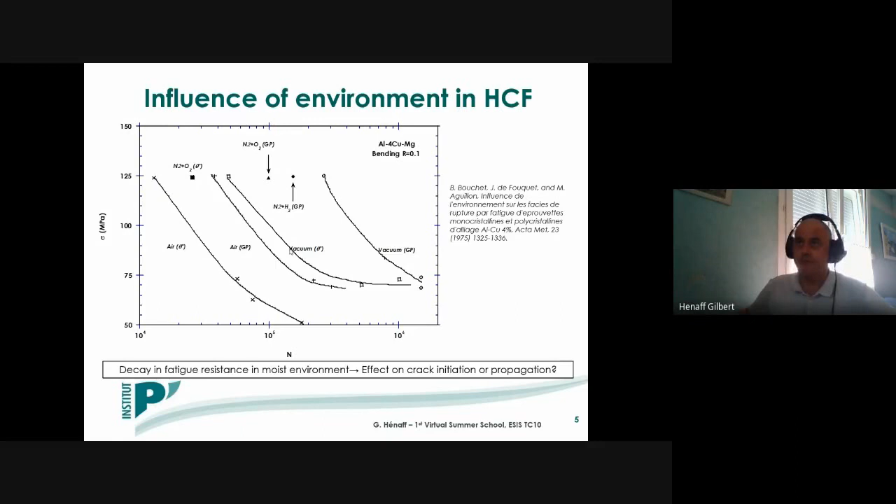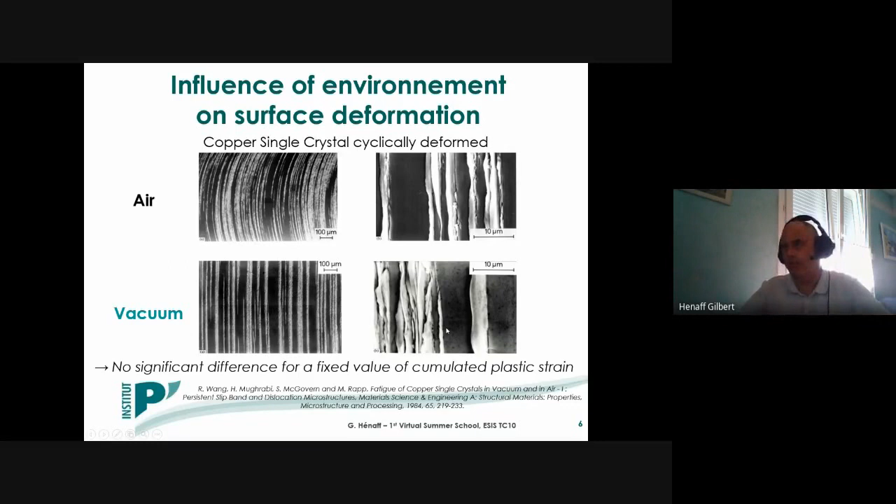crack initiation. However, when comparing these observations between air and vacuum for a given value of the cumulative plastic strain, what was concluded is that there is no significant difference in the surface relief which is formed for a fixed value of this cumulative fatigue plastic strain.

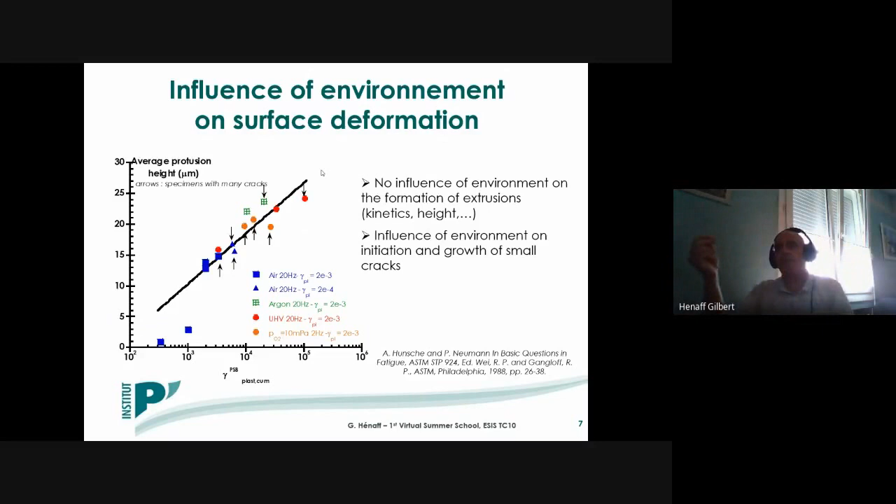And so the conclusion from all these observations was to say that environments such as ambient air do not influence the kinetics of the formation of the surface relief, but will mainly act on the initiation process, and most probably on the growth of small and then long cracks.

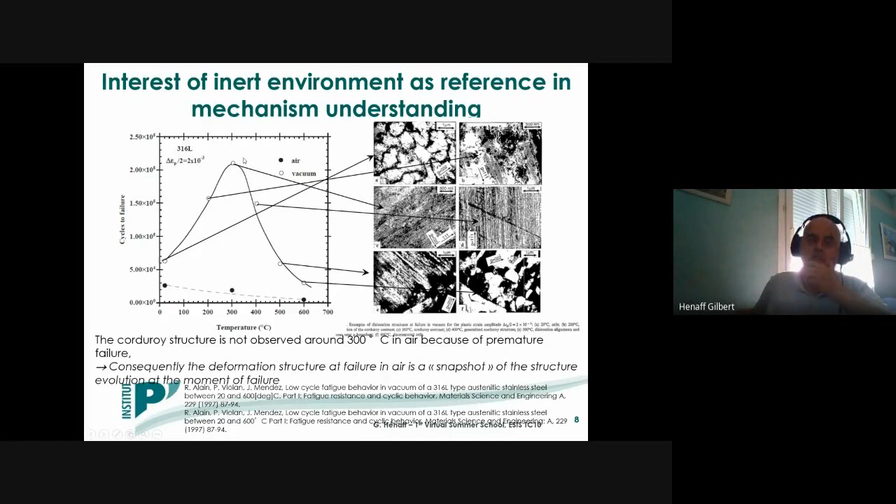However, when looking at the data obtained in vacuum, you can see that we have a maximum in the fatigue life, which is much higher, around 300 degrees C, and then decreases again. At 600 degrees C, the difference between air and vacuum is not so large.

And this special behavior in vacuum was explained by looking at the internal dislocation structure, where it was shown that at low temperature, you have a classical cell formation, dislocation cell formation. And when temperature increases, this structure evolves towards the formation of this special microstructure consisting of lines of dislocation, which is called the corduroy structure.

And again, when moving to higher temperature, you modify, you disable this corduroy microstructure, and you find something corresponding more or less to the cell structure.

But the point is that if you perform the same type of observations in air, you will not observe the corduroy structure at 300 degrees C, because failure will occur much earlier during the fatigue life due to the assistance of environmental effects. Typically, the deformation internal structure that you would observe in air at 300 degrees C would be only a snapshot of the evolution of the dislocation structures towards this corduroy structure.

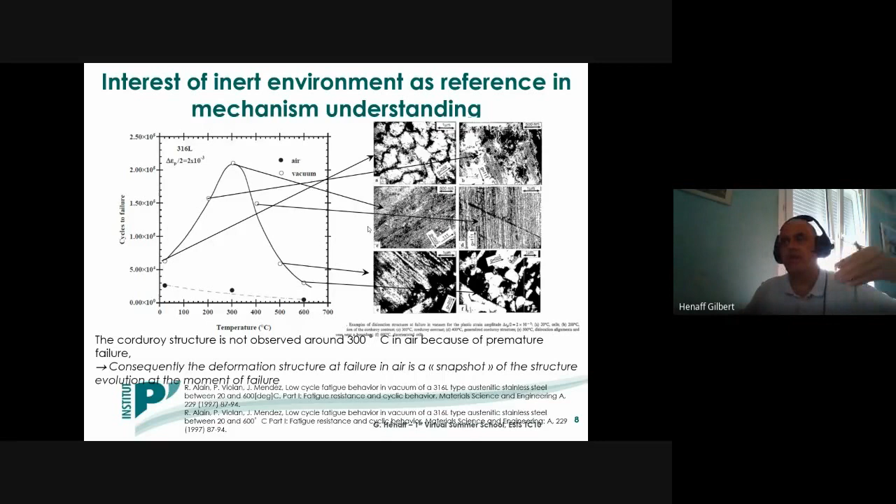And this raises the question of selecting air as a reference environment for the design codes of this type of structure, typically piping systems in nuclear power plants.

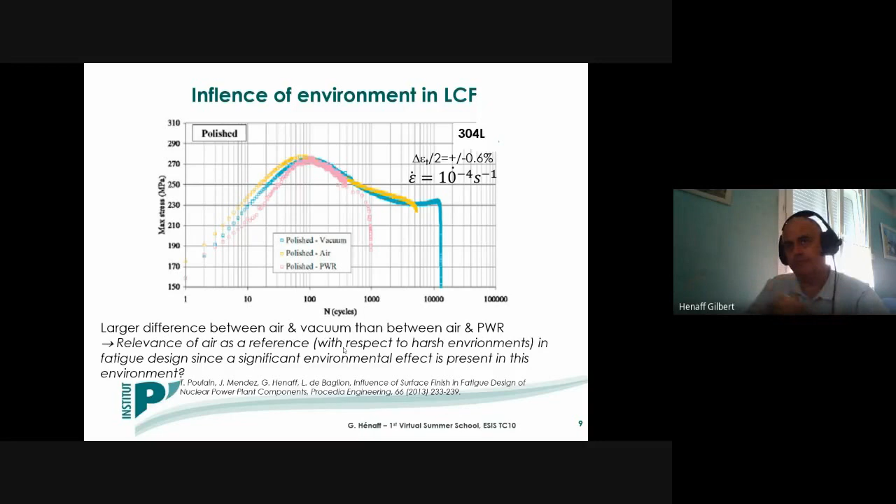So that means that in many cases, ambient air is at least as aggressive as other environments which are assumed to be corrosive.

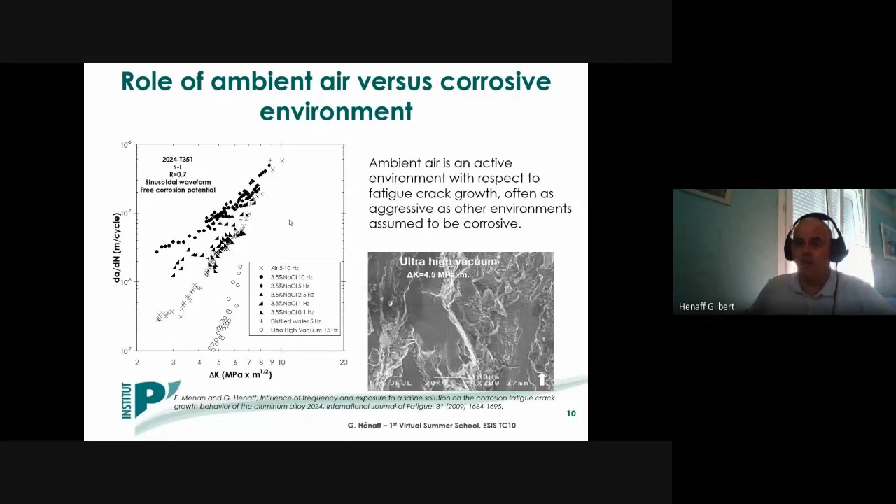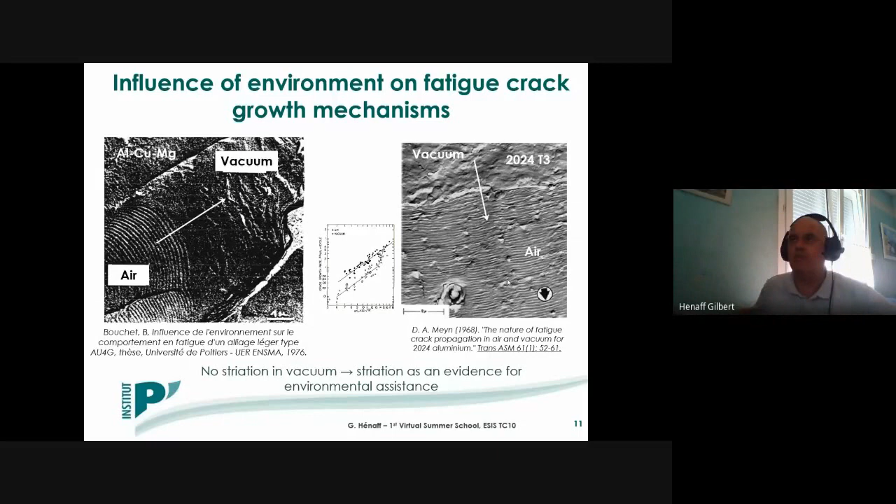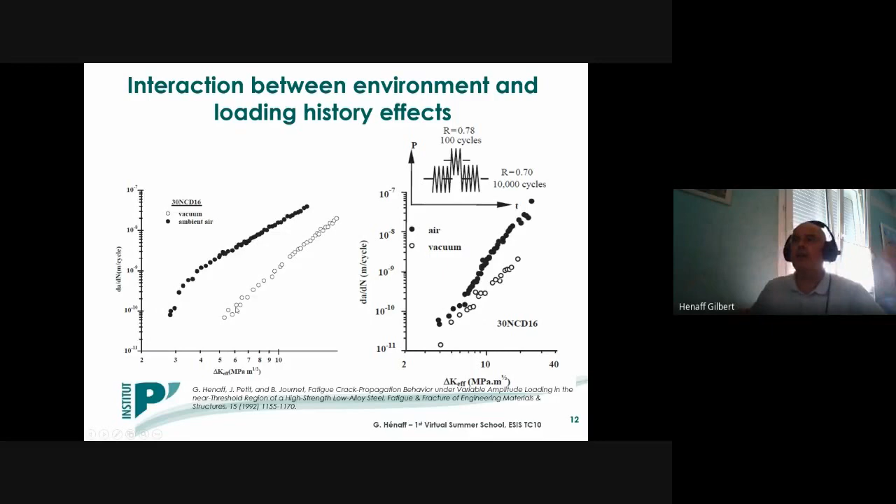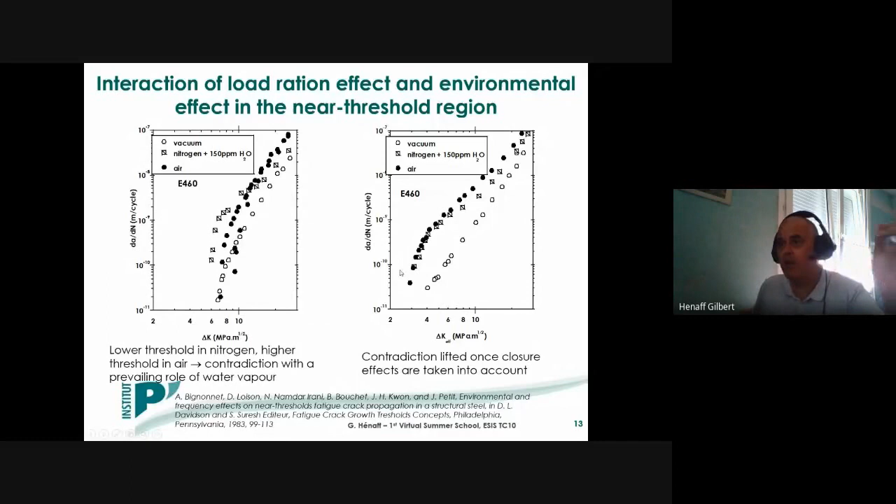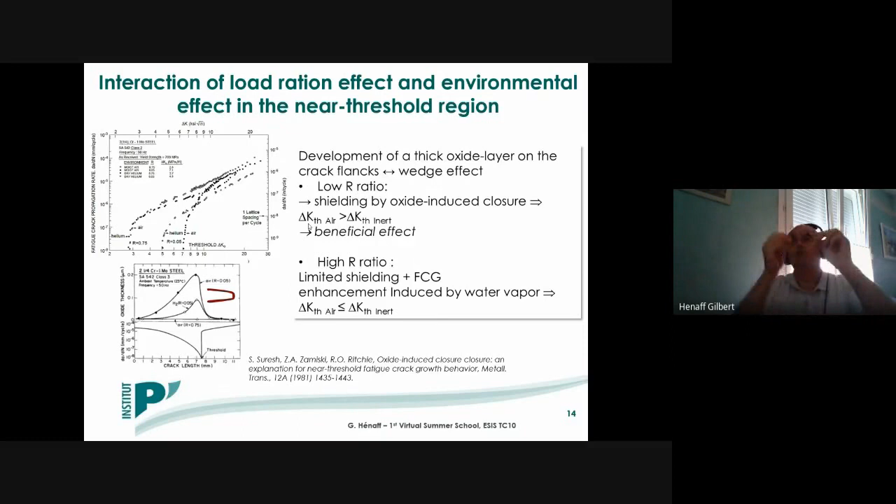On this graph, you have some measurements of the oxide thickness on the fracture surfaces in air or in hydrogen containing traces of water vapor. What you can see is that in ambient air near threshold, the oxide thickness is much more important than in other environments, or even in ambient air when considering a higher value of the load ratio. So near threshold, at low R ratio, you have a kind of wedge effect induced by this thick oxide layer, which will in turn induce a shielding of the crack tip and reduce the effective value of the stress intensity factor range at the crack tip.

As a consequence, in most cases, the threshold in air will be higher than the threshold measured in inert environments or environments with only very small traces of water vapor. But what is important to note is that this is beneficial from the point of view of the global fatigue crack growth rate resistance.

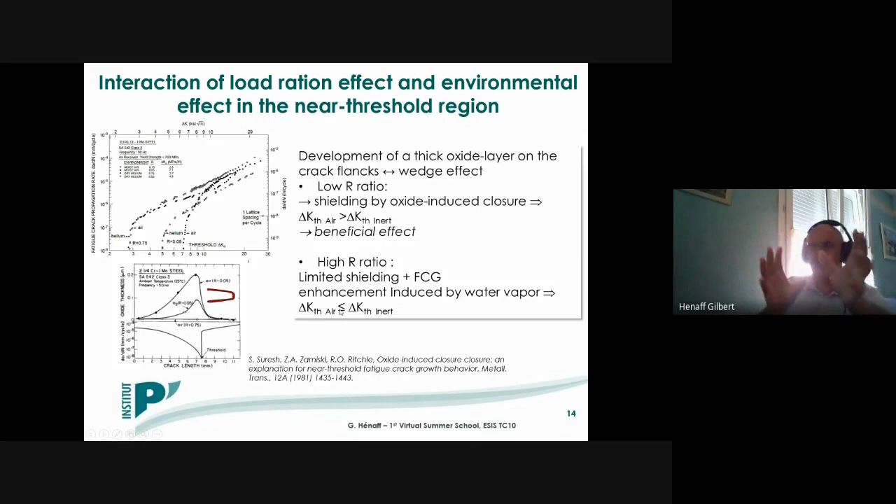However, at high load ratios, the shielding induced by closure will be extremely limited. In addition, this is partly due to the fact that the oxide layer will be much lower in that case. So you will have a combination of limited shielding by crack closure, but still the presence of fatigue crack growth enhancement by water vapor. As a consequence, the threshold in air will be lower than the threshold in inert environments.

So from all these examples, we can deduce some methodological aspects. Our objective in the following will be to try to identify the specific environmental effect on the crack tip damage and not on the overall fatigue crack growth resistance, in particular by taking into account the shielding induced by crack closure effects.

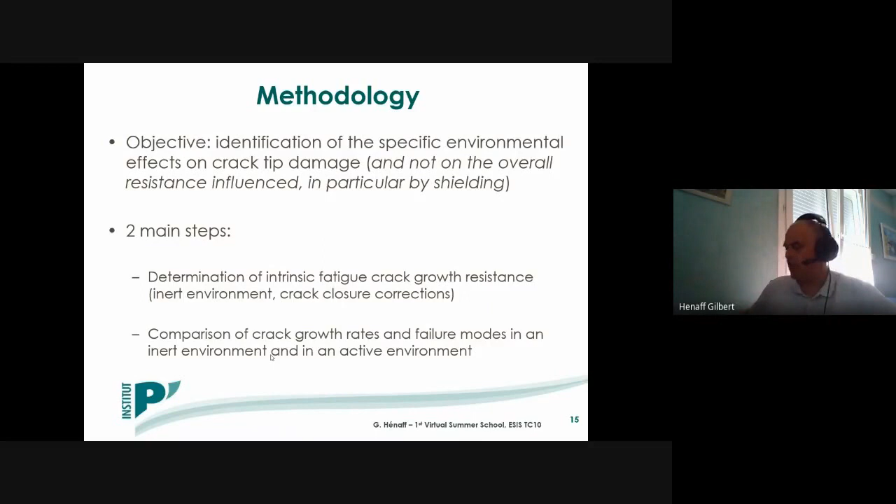For that, we will proceed along two main steps. First, we will have to determine the intrinsic fatigue crack growth resistance, that means in an inert environment and after crack closure corrections. Then by comparing the fatigue crack growth rates obtained in an active environment such as ambient air and in an inert environment, but also by comparing the fracture surfaces, we will get insights into the mechanisms operating at the crack tip. So let me say a few words about what I mean by intrinsic fatigue crack growth resistance.

This intrinsic fatigue crack growth resistance has to be determined in a perfectly inert environment. So you have to limit as far as possible the presence of water vapor, and also, as I explained before, by taking into account the crack closure effect that can reduce the effective stress intensity factor range at the crack tip.

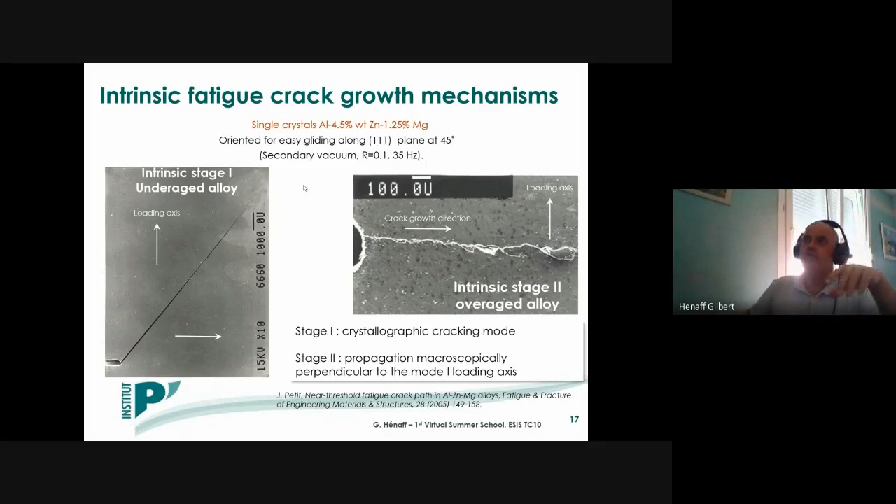But in these alloys, especially in some cases, you can also observe a propagation mode which is somehow a mixture of these elementary propagation modes. That means that from a macroscopic point of view, the crack path is perpendicular to the loading axis.

But if you look at the microscale or at the scale of the grain, you can see that within a given grain, the crack propagation takes place along a single slip system, and you have to initiate another slip system in the adjacent grain in order to resume the propagation. And at the end, you have this type of zigzag crack path or rooftop crack path.

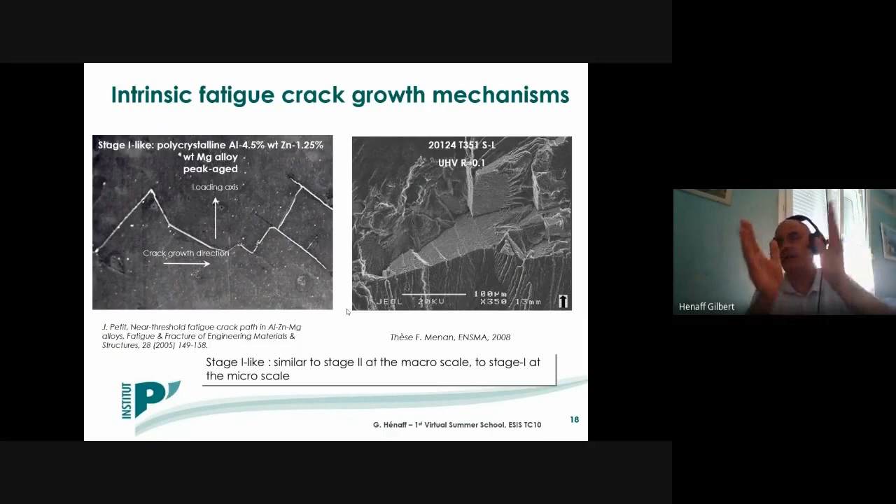And when you look at the fracture surfaces, you have the presence of these crystallographic facets, which are also indicative of this crystallographic propagation at the scale of the grain. And this is what we will call the stage 1-like propagation, which is similar to stage 2 at the macro scale and to stage 1 at the micro scale.

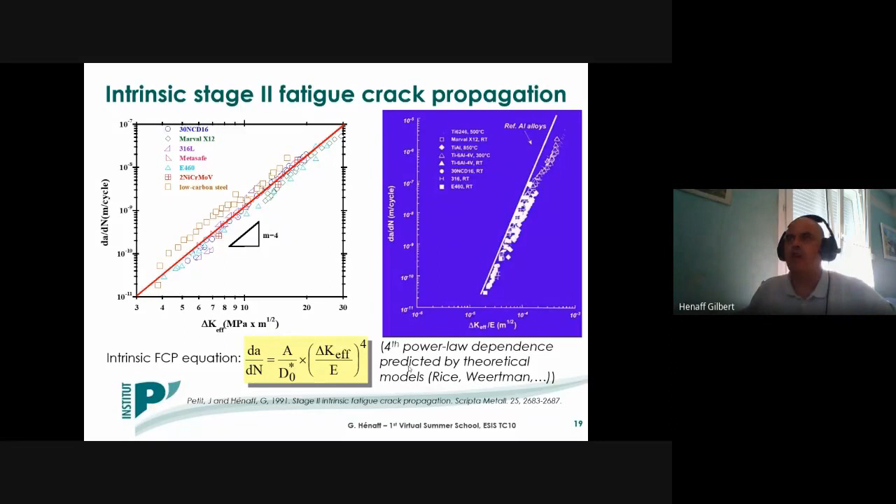So now that we have characterized the intrinsic fatigue crack growth behavior, let me move to the analysis of ambient air. In literature, this has been addressed, for instance, by Bob Wei and co-workers, and has been described in the form of a sequential process taking place at the crack tip.

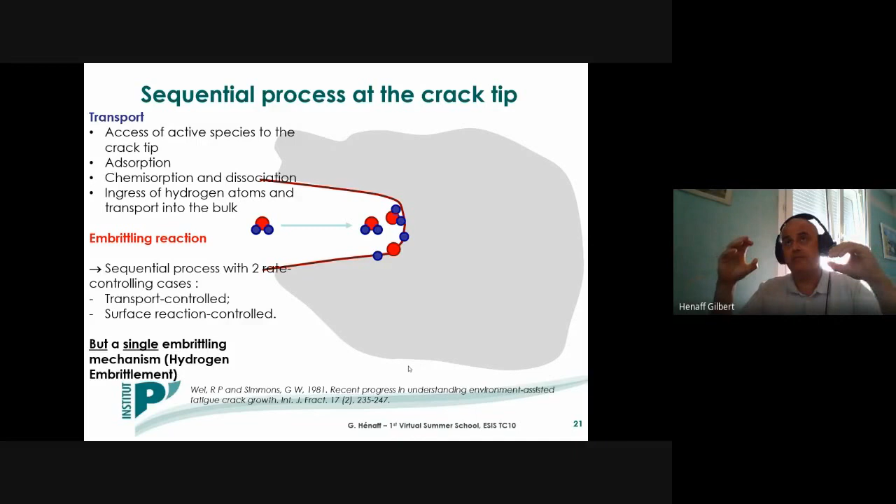First, you have the transport, consisting of the active species moving towards the crack tip. Then you have the physical adsorption of these molecules, for instance water vapor molecules, on fresh surfaces formed at the crack tip, and then a chemisorption process leading to the dissociation of the water vapor molecules, in particular with the formation of hydrogen atoms.

And some of these atoms can then ingress into the material and can diffuse within the cyclically deformed region at the crack tip, where the embrittling reaction takes place.

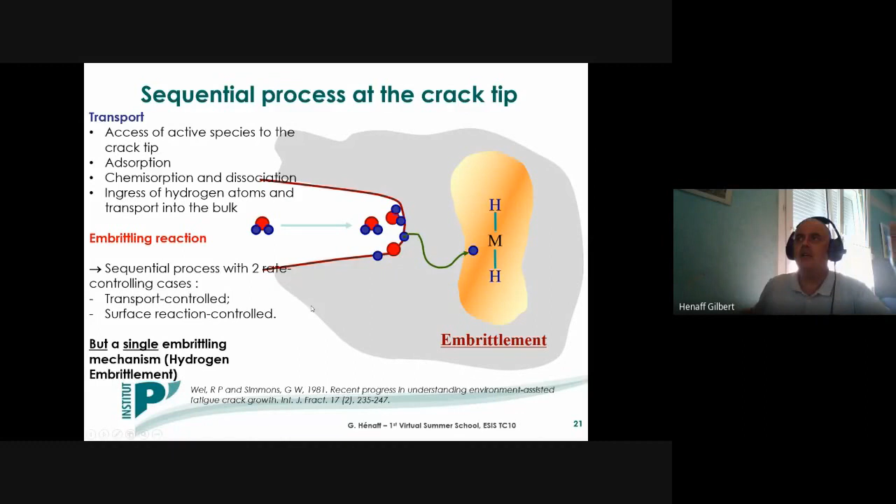What is important to note is that in this analysis, although we have a sequential process, and Bob Wei identified two rate controlling limiting cases, even with this sequential process, there is only one embrittling mechanism, which is supposed to be a hydrogen embrittlement mechanism.

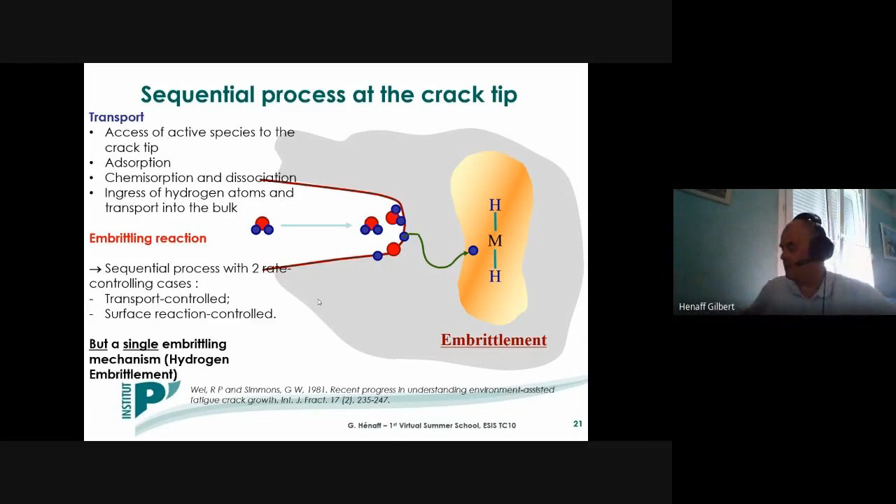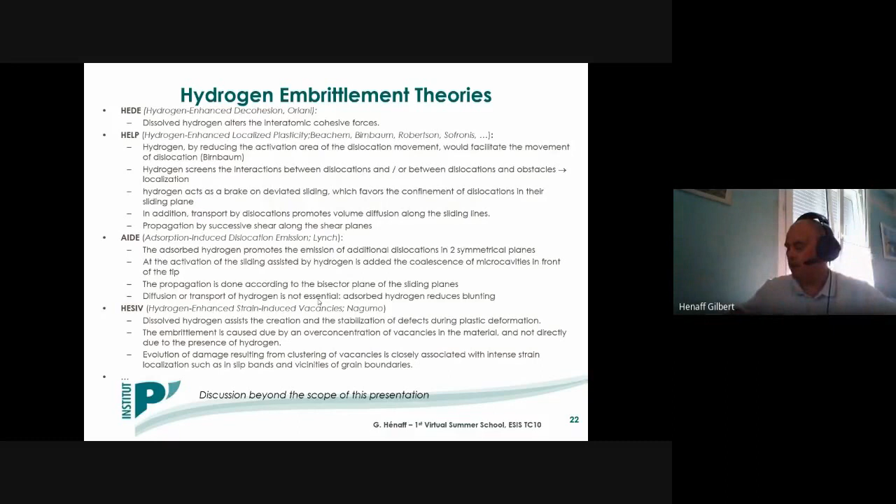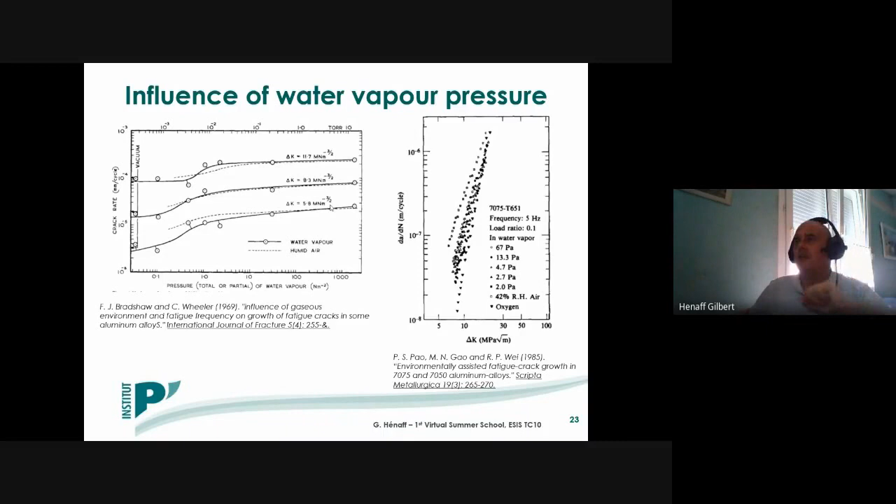At high frequency, it is assumed that due to the low water vapor pressure, the intrinsic crack growth rate is too high to form an adsorbed monolayer of water vapor molecules at the crack tip. As the frequency is progressively reduced, more and more water vapor molecules are adsorbed at the crack tip, and this enhances the crack growth rates.

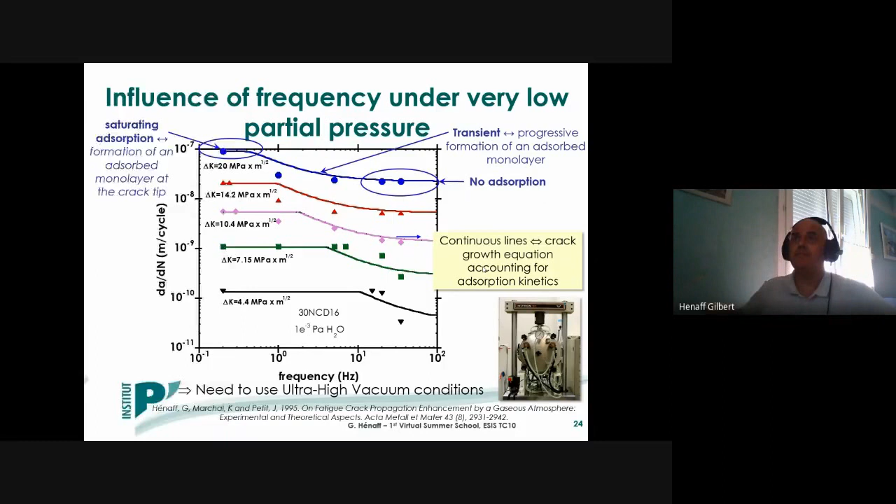And finally, on this plateau, we assume that we have the formation of a uniform adsorbed monolayer at the crack tip. The continuous lines on this graph are the results of an equation that has been established to account for the adsorption kinetics, described here.

So the basic equation is the one that I presented before, where we introduced this critical displacement parameter d star, and we assume that this critical displacement is affected by the coverage rate theta, according to this equation. The coverage rate theta has a value comprised between 0 and 1.

0 means there are no adsorbed molecules at the crack tip, and in that case, the value of d star will be the one determined in our inert environment. Theta equal to 1 means that we have a saturating adsorption process, and in that case the d star value will be equal to d star 1.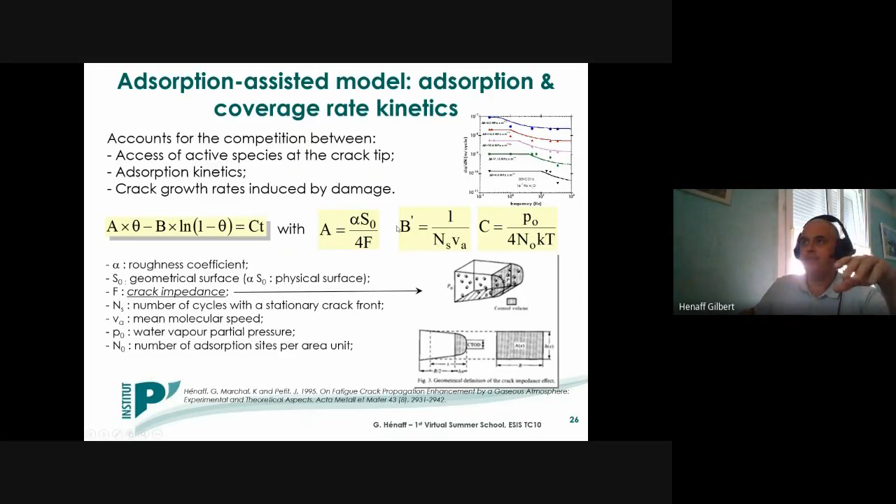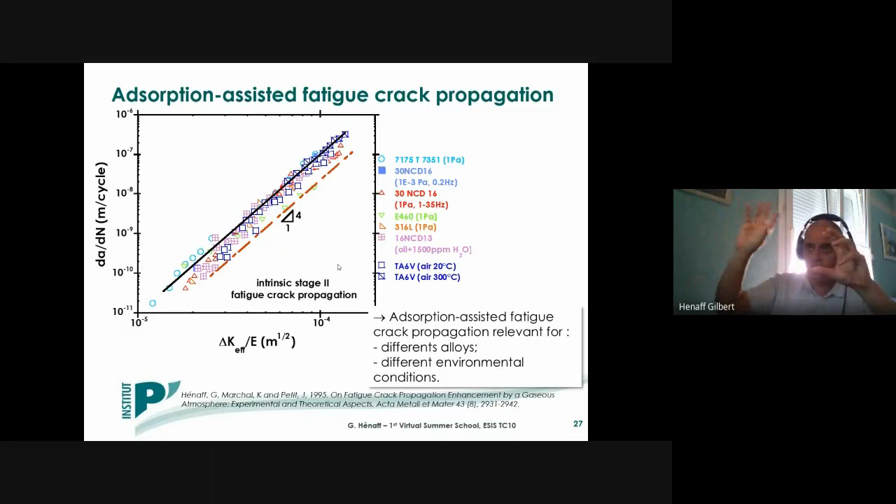We also collected different data on different alloys for different environmental conditions, generally low water vapor pressure conditions. Again, we observed that we have quite a unique relationship, characterized by the same fatigue crack growth rate enhancement factor, but again with the same fourth power law dependency, which is the reason why in the basic fatigue crack growth equation we did not change the exponent and only the coefficient.

So I think I'm running out of time, so maybe I do not have time to detail this. Just to mention that in some cases, here in the case of iron aluminides, in some cases you can have a competitive adsorption between water vapor and oxygen, as described by these equations.

The point is that in that case, in an oxygen atmosphere containing some traces of water vapor, this competitive adsorption process leads to the fact that the fatigue crack growth rates obtained in this oxygen atmosphere are similar to the one obtained in vacuum, while, for instance, in argon with the same water vapor content, in a low delta K region, we have almost the same fatigue crack growth rates as in air. So again, here we have a beneficial effect of this competitive oxygen adsorption process.

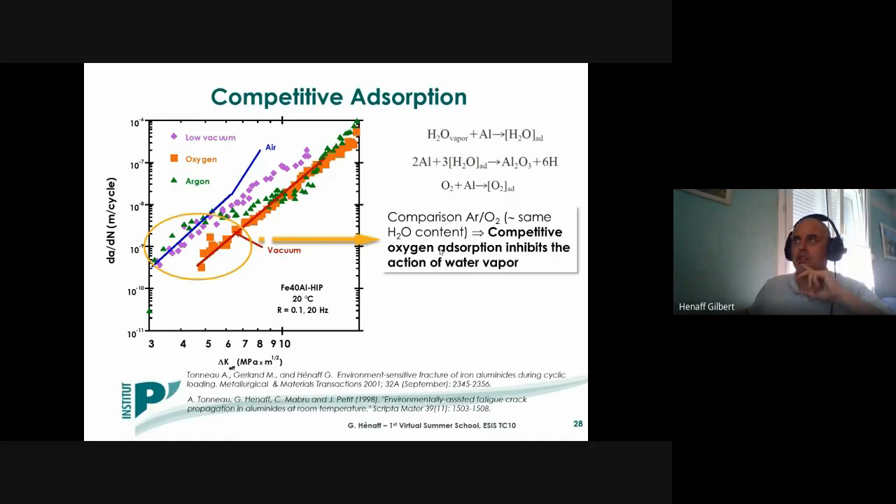Finally, at the end, we analyzed the near threshold fatigue crack growth rate enhancement of steels, aluminum alloys, or titanium alloys along the superposition of two mechanisms, namely the water vapor adsorption process, which will enhance the intrinsic stage 2 propagation, but it can also be stage 1-like propagation that will rapidly switch to stage 2 propagation. So water vapor adsorption will enhance the stage 2 propagation, but again we still have the fourth power law dependence.

And when some critical conditions are satisfied in terms of water vapor partial pressure, or due to the fact that the cyclic deformation will be constrained in a very small microstructural unit, typically within a grain, you will have the triggering of the hydrogen-assisted regime that will induce much higher fatigue crack growth rates. And again, here I do not discuss the precise nature of this hydrogen-assisted regime.

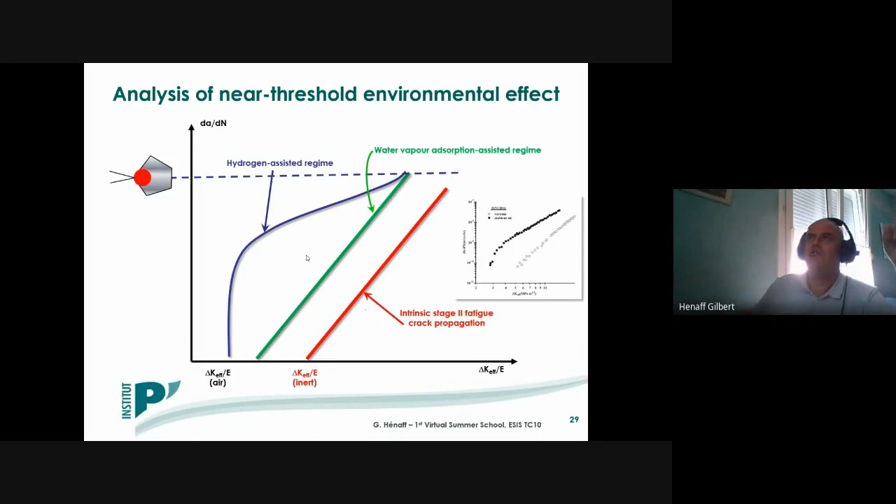Just to finish, in order to describe the sequential effect of water vapor adsorption and then hydrogen assistance, we introduced this equation relating the fatigue crack growth rate to the effective delta K value, with this superposition of the fourth power law equation describing the adsorption, as I explained before, and here an empirical equation taking into account the hydrogen effect. By using this equation, we are able to nicely depict the near threshold behavior here in the case of a high-strength low-alloy steel.

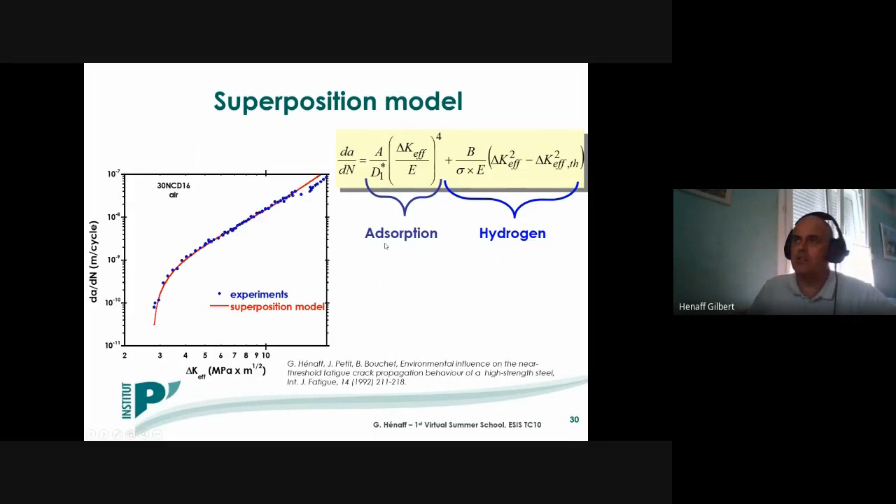So just to finish, I will skip the section on high pressure of hydrogen unless you really want to see it. My message will be first to emphasize the fact that the fatigue data established in air, generally for model identification or for design curves, integrate sometimes some complex couplings with environmental effects. My suggestion would be that it would be better to base this type of analysis on intrinsic data, as I showed during my talk.

And the second point is that I hope I've convinced you that the action of ambient air in the near threshold region is due to the combination of two distinct sequential mechanisms, namely water vapor adsorption and then hydrogen-related mechanisms. But the point is that today we still have numerous gaps associated with the limited information of the local crack tip response to the presence of this moisture or dissolved hydrogen, in order to have a complete description of the process at the crack tip.